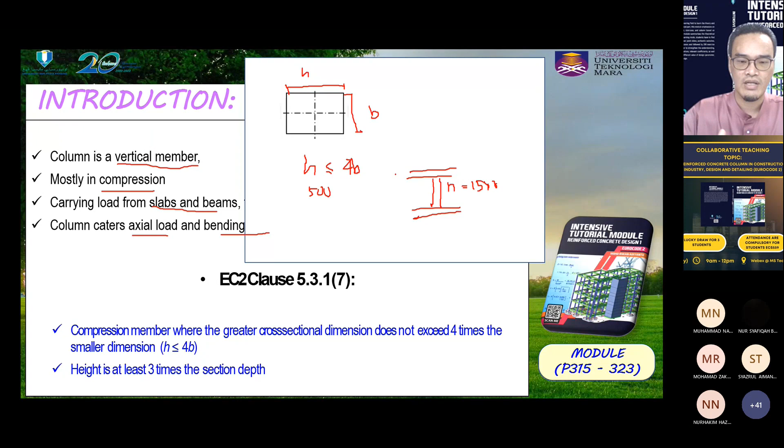So this is the classification of the columns, where we have the braced or unbraced columns. The braced column is the column or situation where the lateral loads are resisted by the shear walls or other forms of bracing, which is capable of transmitting all horizontal loadings to the foundations.

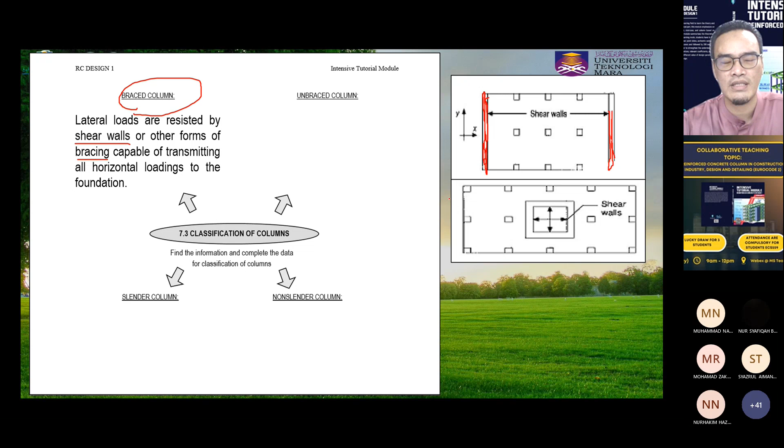As we can see in the figure on the right of your screen, this is the plan view of a structural system, and this one can be considered as the wall, and this is also the wall. For this type of key plan, the column can be considered as a braced column, where the lateral load is resisted by the shear wall.

But the unbraced column is the situation where the lateral loads are resisted by the frame actions of rigidly connected column, beam, and slab. So this is the example of the key plan.

And we have the slender column, which is like this one. Slender or tall column is a very long and thin column, and its failure will be subjected to buckling. Another one is the non-slender column, also known as the short column. This is the figure of the short column, and the failure mode is by crushing.

So this is the procedure to check the slenderness ratio of the column. This is the flow chart, step by step. First of all, we calculate the clear height of the column, and then we calculate the moment of inertia. You don't have to worry because this step we will try in tutorial number 1 later.

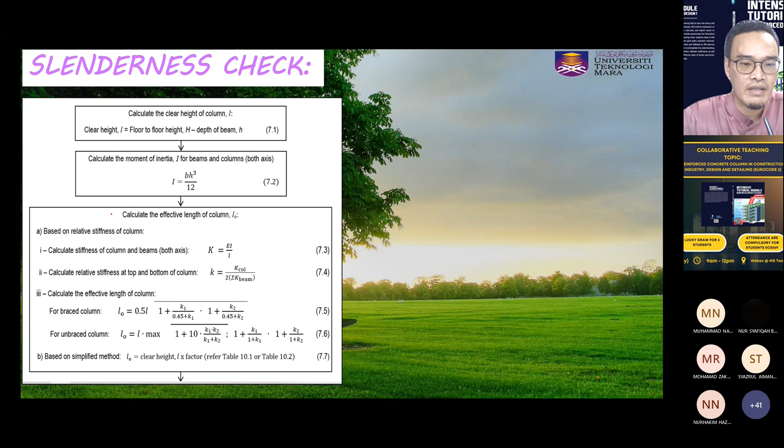And then we can calculate the effective length of a column. Then we proceed with the calculation of the slenderness ratio, this is the actual, and then we calculate the slenderness limit, and compare the slenderness limit to the slenderness ratio. If the slenderness ratio is greater than the limit, the column is considered as slender or tall column. However, if the slenderness ratio is lower than or equal to the limit, the column is considered as non-slender column. You can refer to figure 7.3 in my module, on page 317.

So these are the common failure modes of column. First of all is by buckling, as mentioned before, this is subjected to the tall column. And then this one is by compression, you can see the figure of the real situation on site. Compression is subjected to the short column, and at the middle, if the column fails at the middle, this is strongly subjected to shear failure.

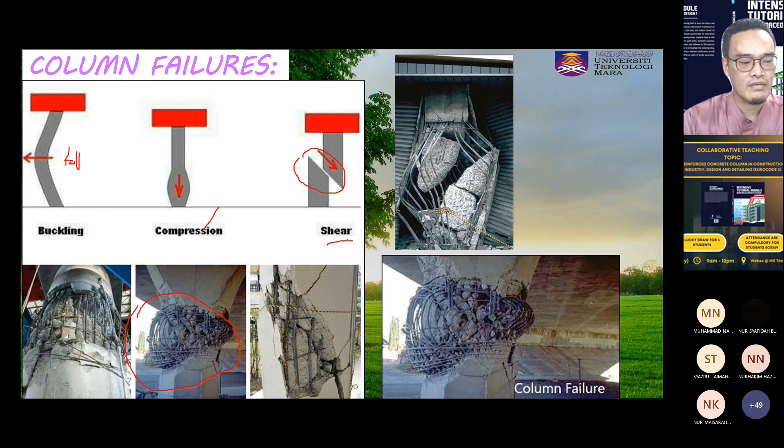So this one is about the axial load and the bending moment. This is in figure 7.4, on page 319 of the module. Theoretically, let's say we want to calculate the bending moment and the axial load, which is the vertical axial load acting on the column located at grid line B2, which I labeled as C3 here.

So we have to consider the slab tributary area. We can observe here that we have 4 slab panels, this one, number 2, number 3, and number 4, which attach on the beam, and the beam is also connected to the column.

So this is the area - quarter of the area from slab 1, quarter of the area from slab 3, quarter of the area from slab 2, and quarter of the area from slab 4, which is half. For slab number 1, length of A to B we divide by 2, so we get the region, and length of grid line 1 to grid line 2 we divide by 2, so we get the region. This is the region where all the loading from this slab and half of this beam and half of this beam will be transferred to the column labeled as C3.

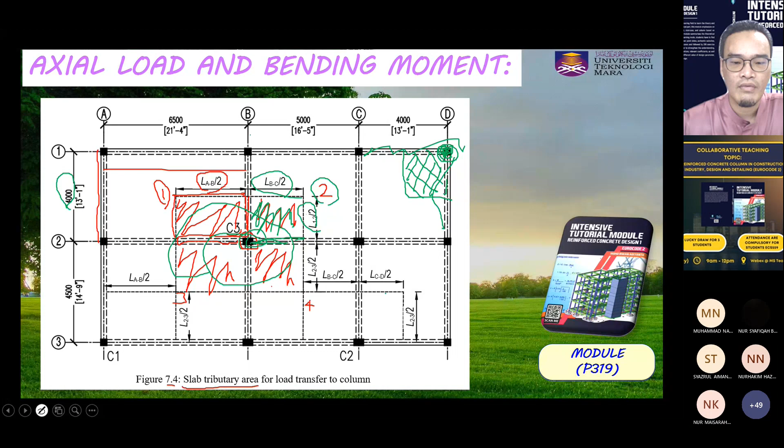So this is about the bending moment. The bending moment in the column can be determined based on the maximum load combination, which is 1.35 GK, where GK is the permanent action, plus 1.5 QK, where QK is the variable action. The minimum only considers the permanent action on beams supported by the column. Let's say we have beam number 1 and beam number 2 - beam number 1 will consider the maximum load combination, and beam number 2 will consider the minimum load combination.

This is the important concept that you have to know: that the stiffness of beams and columns strongly influences the bending moment.

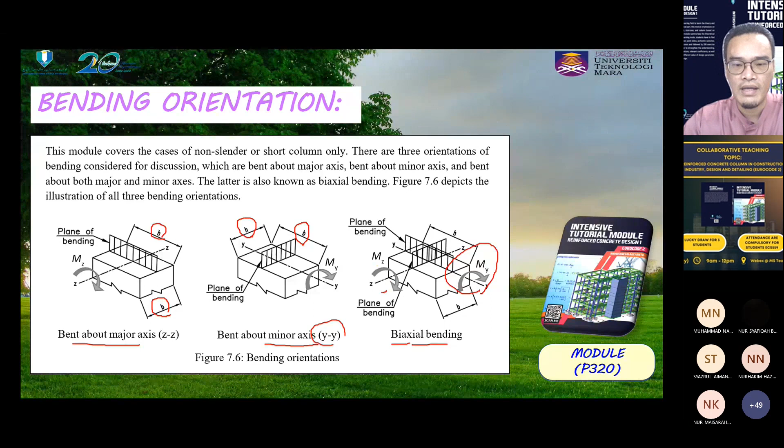So this is an example from this key plan, we can try together. The 3 cases: case number A is biaxial bending, case number B is bend about the major axis, and case number C is bend about the minor axis. Can I have somebody to help me? What is the case at A1 - case A, B, or C? Anybody can try? The column will bend about A, B, or C - which case is it?

Okay, my tab is all functional now, alhamdulillah.

Okay, the column will bend about A, B, or C. Let me give a clue.

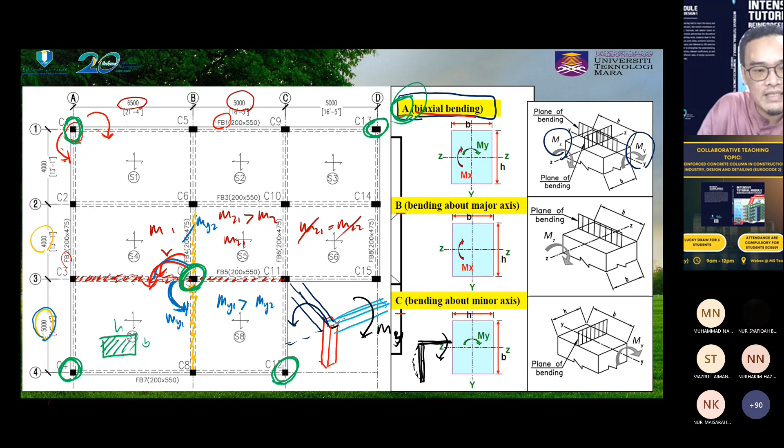So how about case B? You have to look at the dimension of the column. Let's say we have a rectangular shape column like this one, so we might have B and H. Let's say for the case of C6, we have to erase this.

This one you have FB3, so the M1, MZ1. MZ because H is larger than B, this is MZ1, and the dimension is also larger than another part, so MZ1 is larger than MZ2.

However, for beam FB4, which is located vertical, you see the vertical beam here. The dimension is equal, 4,000 and 4,000, and let's say the loading is also similar, so we can assume the moment, this is MY1 and this is MY2. MY1 equal to MY2, so the bending for this direction is cancelled out. The bending is uniaxial and will occur at the major axis, which is B. So C6 is B.

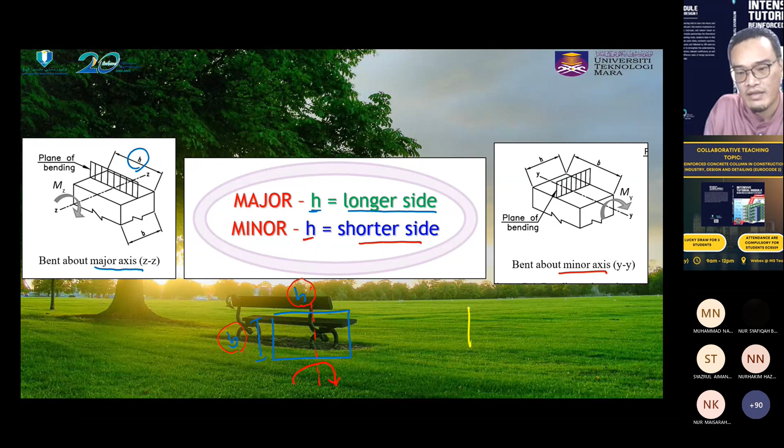Let's say I use this one, and the column, let's say this is 400 and this is your 200. So the bending, let's say the bending is here. This is MY, bending about the minor axis, so 200 becomes your H, the shorter side, and the 400 becomes your B. Any question up to now?

No question. Okay, then this is the design procedure for uniaxial bending.

You can refer to the flow chart in page 321. Uniaxial bending is the bending about major or minor axis only, that's why it's called uni, just single direction. So this is the procedure, it's okay, you don't have to worry. We will do this for tutorial 2, tutorial 7.3.

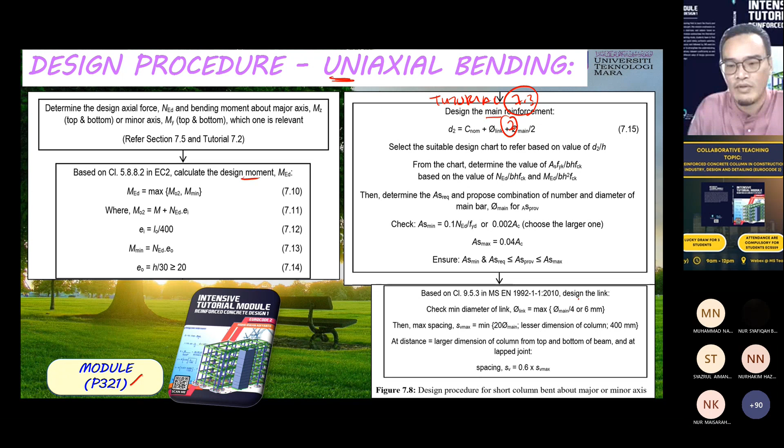So this one is the design procedure. Until we calculate the design moment, we calculate the main reinforcement, and then we design the link. And then for biaxial bending, it's in page 322. This one is quite complicated, because we have to design the main reinforcement and then check the capacity against biaxial bending. So first we have to calculate the design moment, and then check the requirement for biaxial bending based on clause 5.8.9 in Eurocode 2. We have to fulfill all these two main requirements.

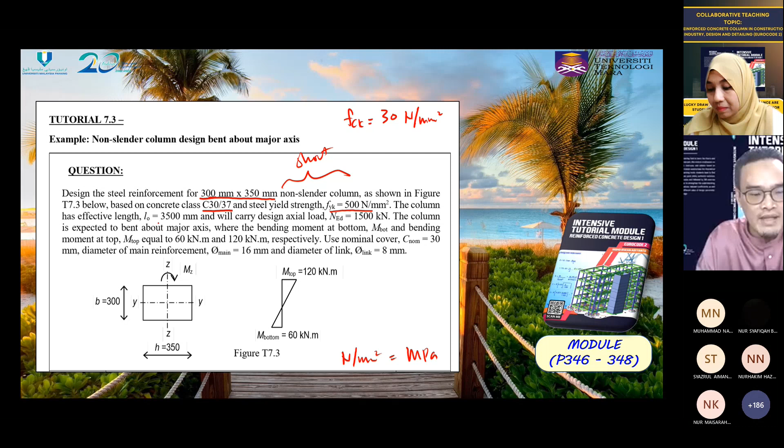So the column has effective length, L0, equal to 3,500 mm and will carry design axial load, NED equal to 1,500 kilonewton. And then the column is expected to bend about the major axis, so this is MZ. So the bending moment at bottom and bending moment at top equal to 60 kilonewton and 120 kilonewton.

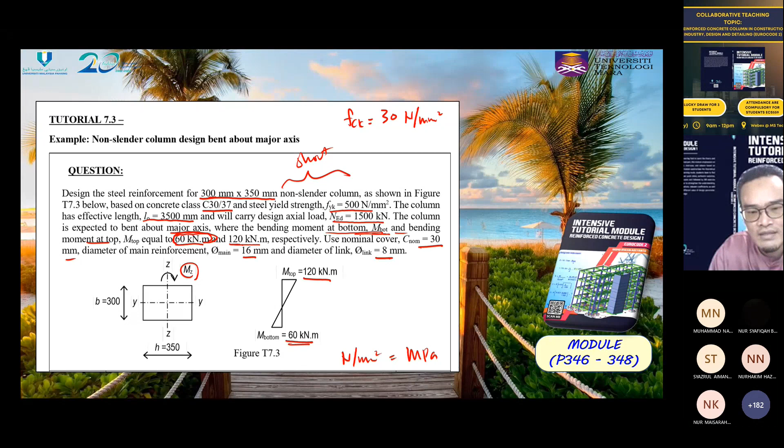So at the bottom is given as 60. So you must be able to read in sequence. So when the sentence mentions the bending moment at bottom and bending moment at top, means the first value belongs to the bottom, which is 60 kilonewton, and then 120 kilonewton belongs to the top. So you must be careful about the sequence of the words used in this sentence. So use the nominal cover, Cnom equal to 30 millimeter, diameter of main reinforcement equal to 16, and diameter of link equal to 8 millimeter. Okay, so I can proceed to the next slide.

So first of all we have to calculate the design moment based on this clause in Eurocode 2. For the non-slender column, the design moment, we have to choose between M02 or M minimum. So M02 is equal to M plus NED times ei, ei is the eccentricity. And then M maximum is between bottom and top. So we select between bottom - this one if you can see, 60 kilonewton, bottom we write down here. And then M maximum is 120, so we write down here. So we select the maximum.

So what is the M now? I hope in this session I need more participation from students to give the answer. 120? Yes good, it's 120, the unit is kilonewton meter. And then ei is equal to L0 over 400, which is equal to 3,500 divided by 400. And may I have the answer?

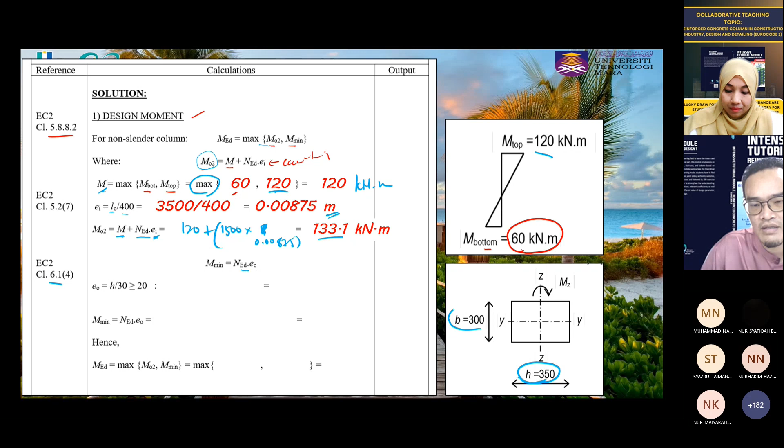So M minimum is equal to NED times E naught. E naught is equal to, you refer to this clause in Eurocode, H over 30. What is the value of H for this case? Because this is the major axis, H is 350, this is the longer side, and B is the shorter side, so it's 300. 350 divided by 30, you will get 11.7.

This is lesser than 20mm, so we need at least 20mm. So we use E naught equal to 0.02 meter, converting the unit to meter. And then M minimum is equal to 1,500 times 0.02. Can you give me the answer?

M minimum is 30, good. M minimum is 30 kilonewton meter. So the MED, which is the design moment, we select between these two - between M02 or M minimum.

So we write down here, this is M02, 133.1, and then M minimum is 30. So this is simple - the M maximum we can use is equal to 133.1 kilonewton meter. So we will design based on this value of moment. Any question on this procedure? I hope it's clear. No sir, no question.

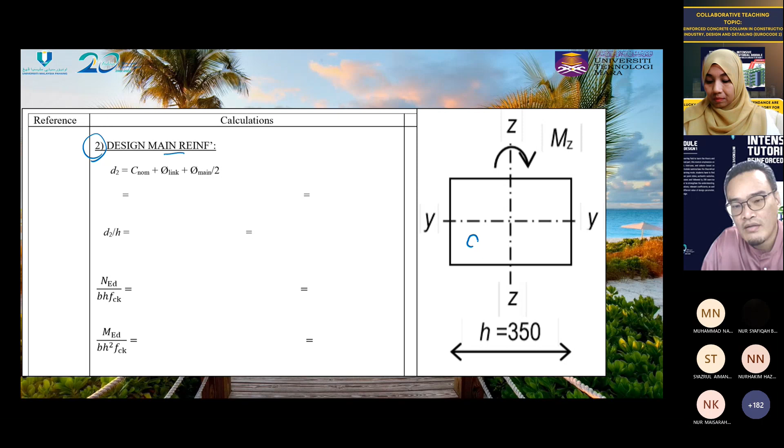Next procedure is procedure number 2, which is the design of main reinforcement. This is the main reinforcement, this is our H, so the D. Let's say this is our column cross section, and this is our main reinforcement - let's say 1, 2, 3, and 4.

And then we shall have, let's say green color, this one is your link - the shear reinforcement or the confinement reinforcement. That's the terms you must master. This one is your link. So I hope you know how to calculate the D.

So this is your D2. D2 is equal to C nominal - this is C nominal from the edge of the concrete to the outer edge of the link, and then the diameter of link, and then the diameter of main bar divided by 2. Can you give me the value of D2? C nominal 30 plus 8 plus 16 over 2. 46, okay good, it's 46 millimeters.

So D2 over H. 46 over 350 equal to - D2 over H is very important. 0.131, okay good, so you can use 0.13.

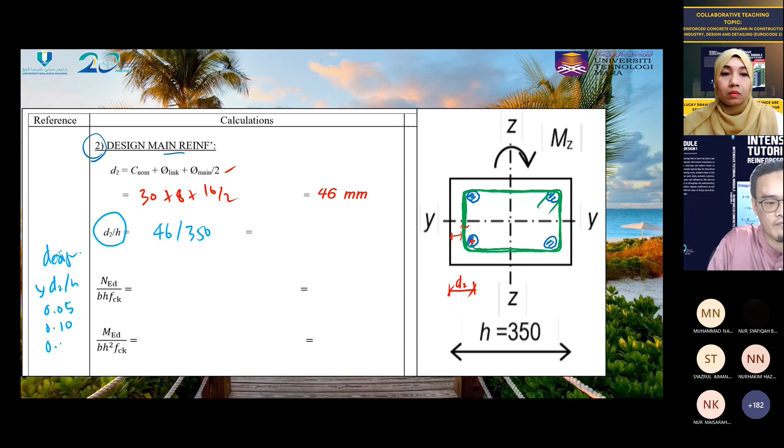D2 over H is very important to determine which design chart you have to refer to, because you have design charts for D2 over H equal to 0.05, 0.10, 0.15, and 0.20. Each design chart will give you a different result. For this case it's 0.13, so we may use the design chart of 0.15.

Before using the design chart, we have to determine the value of NED over BH FCK, and we have to determine the design moment over BH square FCK. That's why B and H are very important. Between the major and minor axis, you have to determine which one is B and which one is H - either the longer side is H or the longer side is B. So may I know this one?

NED is equal to 1,500 times 10 to the power of 3. Remember, when you are dealing with axial force for this type of calculation, you have to multiply by 10 to the power of 3 for unit conversion. Our B is equal to what value? 300, okay good, 300 times 350, and then FCK, as mentioned earlier, is 30.

So what is the value here? 0.476. Okay, so we make it 0.48 - make 2 decimal places only for easier use of the design chart later.

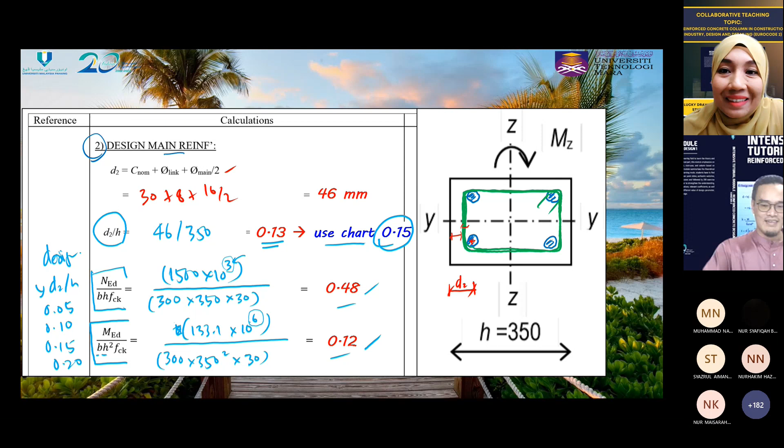Okay, so we refer to this chart.

So we have to know the value of N over bhFCK, which is 0.48 based on our calculation before, and then the M over bh square FCK, this one is equal to 0.12.

So on this chart, this is for 0.48, between 0.4 to 0.5, you have to scale it properly, and then draw a horizontal line in blue color. For the bending moment, you draw the red color vertically, and you have to scale it down properly.

So you can see 0.10, this one is 0.11, so this is 0.12, here is 0.13, 14, and 15. So we use 0.12 based on our calculation.

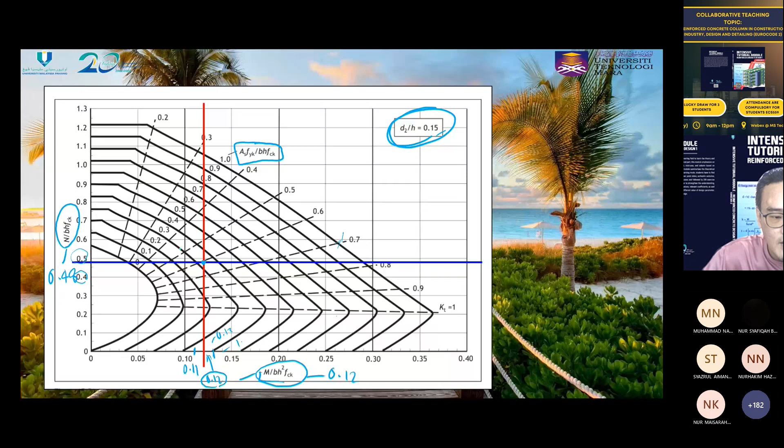Let's say I change the color. The yellow color here is for 0.3, and then I use a green color. The green color here is 0.4. So the ratio is located between 0.3 to 0.4.

So you have to estimate the exact value. Based on my observation, anybody want to suggest the value?

It's here, located here. So let's say this is 0.35. So let's say I use this one equal to 0.33.

So the ratio of ASFYK divided by BHFCK is equal to 0.33.

So we rearrange this equation to become like this. We bring down the value of 0.33, and then we have BHFCK and FYK. So we want to know the AS required. We solve this equation.

So may I know the value of AS required? 2079. Okay, good. Thank you. 2079 millimeter square. So we refer to the chart.

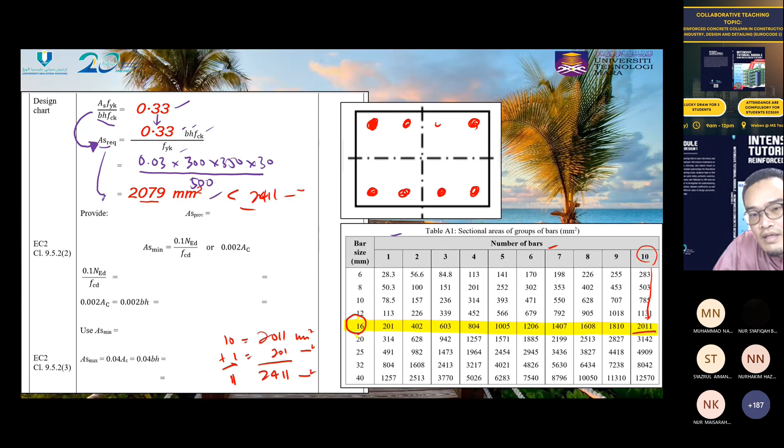Okay, so this is also 11. Boleh tak you susun macam ni? Dari segi calculation dah okay, tapi dari segi practicality tak okay. As engineer, you have to think how the workers will install the steel bar later. So let's say we have 11: 1, 2, 3, 4, 5, 6, 7, 8, 9, 10, and 11. So it's quite rare, agak-agak janggal kalau kita ada column yang sebegini.

So we better have another one, which is 12. So if 12, H16, may I know the AS provided? Let's say 2011 plus 402, so the answer is 2413. Betul, good. So provided is 2413 mm square. This is greater than the AS required, so it's okay, and we have a better arrangement.

So we have to check, based on this clause 9.5.2 in bracket 2 of Eurocode. Before we proceed, I'm sorry because of an error in the module - this one shall be FYD, not FCD. FCD is for concrete, but this one is for steel, FYD. Sorry for the typing error. I hope I can revise the module soon, maybe in the second edition I can repair it.

So this one, 0.1 times NED is 1,500, times 10 to the power of 3, divided by FYD, which is 0.87 times FYK, 500. So what is the value? Anybody can help me give the answer?

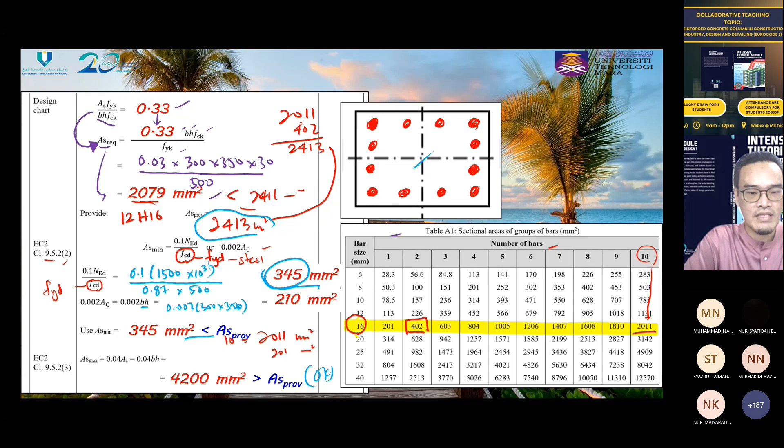Okay, next. So this is the arrangement, then this is the calculation, the comparison between provided and maximum and minimum. So this is the design of the link.

Based on this clause in Eurocode 2, the minimum diameter of the link shall be this one. This means you have to select the maximum between the diameter of main bar divided by 4, and 6 mm. Diameter of main is 16 divided by 4, which is 4. So we select maximum between 4 and 6, which is 6 mm. So we propose 8 mm, which is greater than the minimum of 6 mm, so it's okay. We can proceed to the spacing.

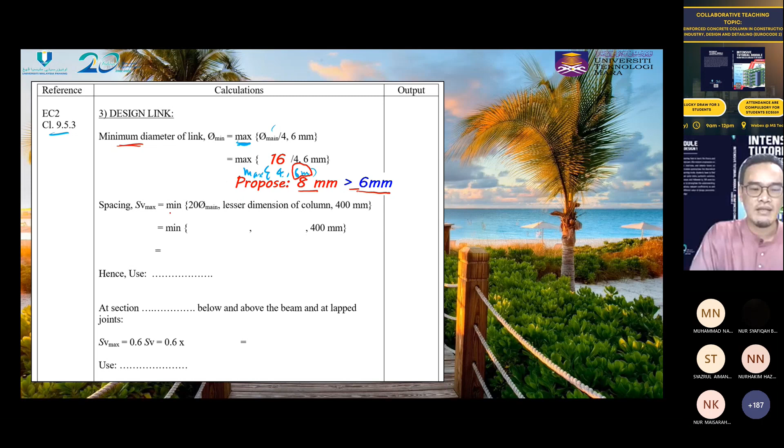This one we select the minimum. Make sure you know how to find this page - refer to this clause. Sorry, saya tak ingat page nama yang mana. I believe this question will not be given in the exam because it's already inside the code, so you must know it.

So 20 times diameter, which is 16, and then the lesser dimension of column - we have B equal to 300 and H equal to 350. So we select the lesser, which is 300, and we select the minimum between the results: 20 times 16 is 320, 300, and 400. So we select this one, and we can use H8 at 300 millimeter center to center.

However, this is at the middle of the column. At the section, we select the larger dimension - 350 is the larger section, because we have a rectangular column: 300 and 350. So at the section, 350 mm below and above the beam and at the joint, the S maximum is 0.6 SV, so 0.6 times 300 equals 180.

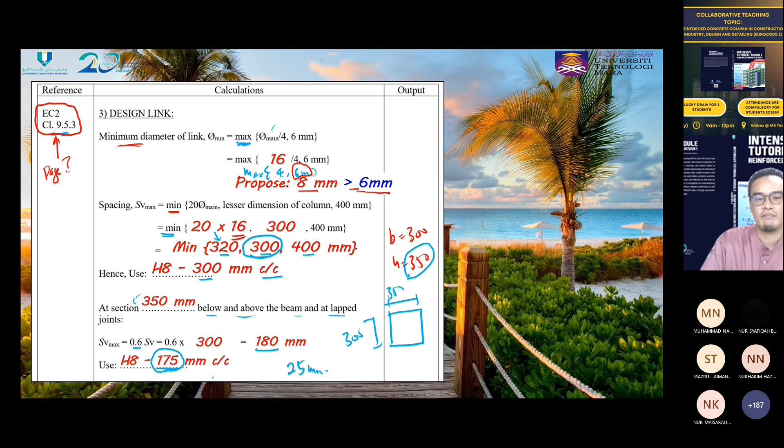Okay, 180, so we can propose H8 at 175. We try to use increments of every 25 mm, so we lower down to 175 - this is the practical practice on site.

Okay, so now we come to the detailing. Make sure you know how to draw this - this is the elevation view, and this is the cross section, which I got from my sketching. So this one, we have twelve numbers of steel bar in the cross section.

This one is 350 mm lower than the soffit of the upper beam, and then this is the lapping zone - you can check this in the code. Usually we don't provide lapping too close to the beam at the bottom, because this is seismic design - we call it the critical region. So the lapping must be provided outside the critical region.

So this, let's say the green color - this is what we call the starter bar. That's why we provide lapping here, from the bottom column starter bar, and then the reinforcement we calculated just now - let me use the red color.

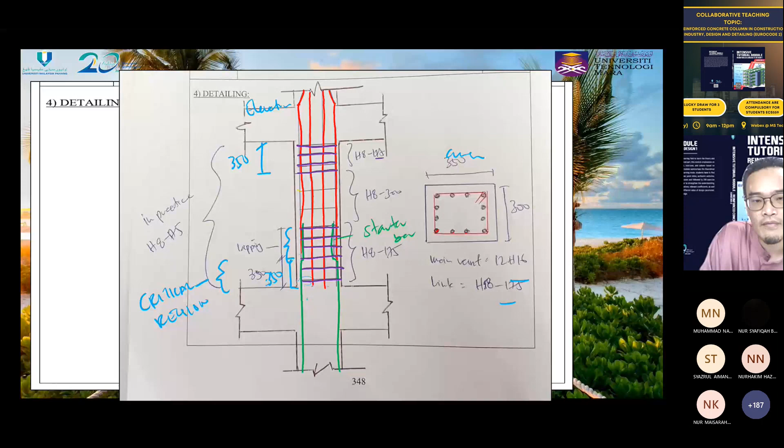Okay, this is also here at the lapping. And outside the lapping, at the middle, we can use a larger spacing, which is 300, based on our calculation.

But usually in practice, we use the spacing of 175 for all, from bottom to the top, we use the spacing of 175 all.

Okay, this is to save the cost, but this is okay. We use a larger spacing at the middle to save the cost because we can reduce the steel reinforcement. But in practice, for faster work or better supervision, we can provide equal spacing.

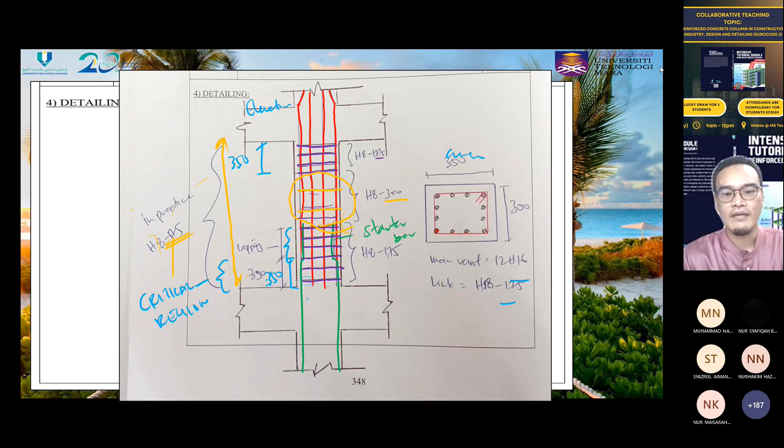Okay, that's all for this tutorial. Congratulations. So those who have the module can try exercise A1 and A2 on page 331 and 332.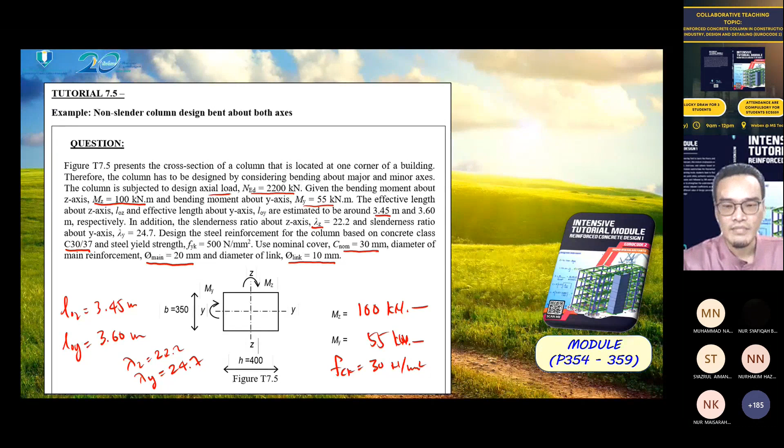Okay, so we start with the first step which is to calculate the design moment. The step by step is based on the flow chart which I shared with you in the short lecture at the early of the session. Okay, so the imperfection moment we can calculate based on these equations.

Okay, so the imperfection moment is equal to, okay, we do it together. So NED is equal to 2200, and then L0 of Z is equal to 3.45 divided by 400. So what is the imperfection moment about Z axis? 18.98, okay, we can use it as 19. And then how about the Y axis? 3.6, okay, 19.8, okay 20, it's just a matter of decimal places.

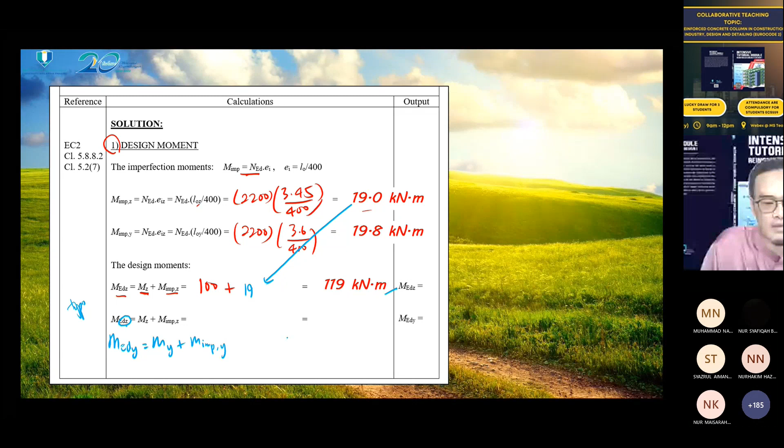Okay, so the design moment for Z-axis is the given MZ plus the imperfection moment of Z-axis, so it's equal to 100 plus 19, so it's equal to 119 kilonewton meter. Okay, but for this one, this is actually MEDY. Tadi dah Z, so this is a typing error, typo, very sorry for this mistake. So this one MZ, this actually is MY, and then this is MY. Okay, so the MY is equal to 55 plus the imperfection which is 19.8.

Okay, can I have the answer, please?

74.8 kilonewton meter. So thank you. So the second step is to check the requirement of biaxial bending.

The source of this figure is figure 5.8 from Eurocode 2. Let's say the column has an offset. This is the center of the column, and this is the center of the axial force. So this is the eccentricity about y-axis, and this is the eccentricity about z-axis. So we have to find the eccentricity.

Moment MEDY we calculated before is 74.8 times 10 to the power of 6 divided by NED, which is 2,200 times 10 to the power of 3. So we can observe here that MDY, about the y-axis, this is MEDY, will create the eccentricity about z-axis. That's why the equation uses MEDY. So may I have the answer?

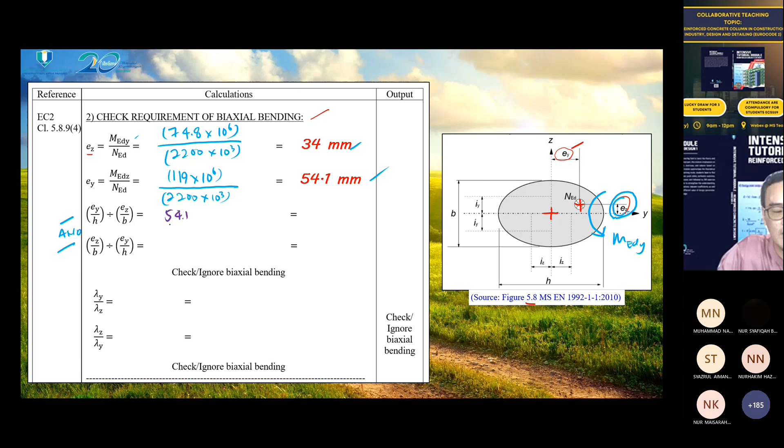So can we do it together? EY is equal to 54.1. H, in this case, is the longest, which is 400. So we divide exactly 34 divided by 350. What is the value here? 1.39, which is greater than 0.2.

So how about another one? Which is 34 divided by 350, divided by 54.1 divided by 400. 0.72, which is greater than 0.2. According to the code, the limit must be lesser or greater than 0.2.

If these two conditions already exceed the limit of 0.2, we have to check. Yes, we have to check the biaxial bending. The conclusion is we have to check the biaxial bending.

Another checking is the slenderness limit, the slenderness of y-axis, which is 24.7 divided by 22.2. How about this one? 1.11. This one is lesser than 2.0, as limited by the code. The code limits the value to 2.0 or lower.

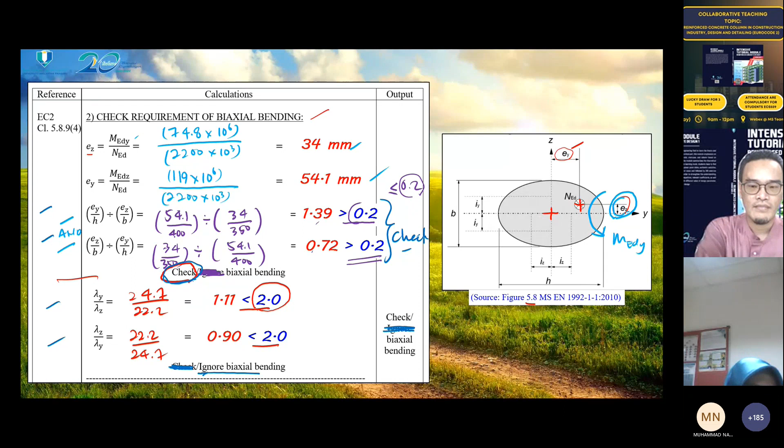So this one, we have to design the main reinforcement. Step number 3, we have to calculate the effective depth, which is H prime and B prime. This is for the major axis, H prime, and this for the minor axis, B prime. So can I know the value of H prime and B prime?

Okay, you just use this equation, and then you just have to replace B with H for H prime. May I know the value of H prime?

Anybody can help me? H prime, 350. 350. And then B prime? 300. Good, 300 mm.

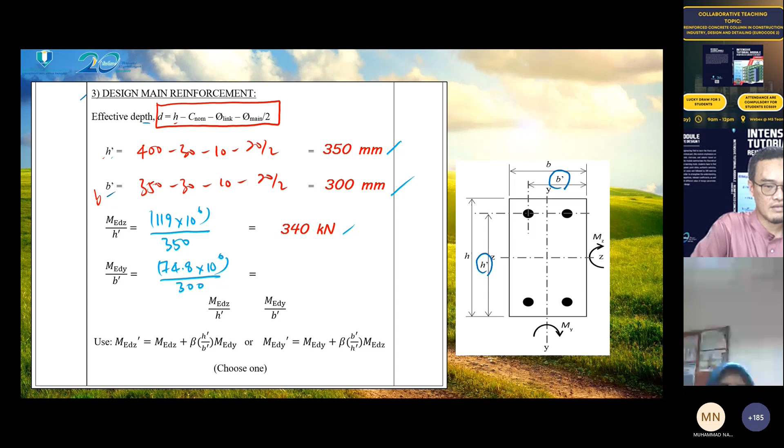340 kilonewton, okay, 340 kilonewton, and then another one is 249 kilonewton, okay, 249 kilonewton. So we have to, okay, this one, please give your attention.

So this one you have to compare, okay, between these two ratios. MEDZ over H prime, you compare to the value of MEDY over B prime. So we can observe clearly here that 340 is greater, okay, this one is 340 and this is 249. So MEDZ is

greater than MEDY over B prime. So we select this equation, okay, to determine the value of design moment, final design moment. If, okay, let's say the value of this one is 400 kilonewton. Okay. So this one is greater than 340. So we use this equation.

Okay, so this one you have to be careful. Then maybe you can check this one in Eurocode, or those who have the module you can check in the flowchart.

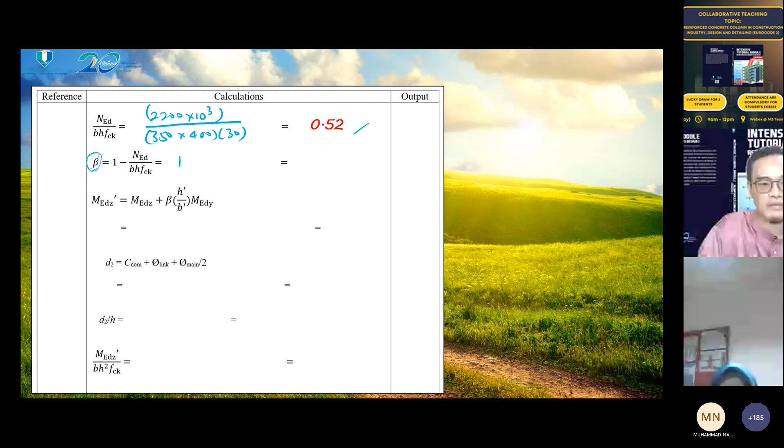So because the beta will be used in the equation we selected before, okay, so this one is 1 minus 0.52, okay, because this one is here actually. Okay, so what is the value of beta? 0.48, okay, because 1 minus 0.52.

So the beta shall be greater than 0.3, and the beta shall be lesser than or equal to 1.0. So 0.48 is here, okay, it's in between, so it's okay. So we can use this equation.

We can insert the value of MEDZ plus the beta 0.48, then the H prime over B prime, 350 divided by 300, times EDY, and EDY is 74.8 times 10 to the power 6. Okay, may I know the final answer?

Okay, anybody can help me? Anybody from UMP or UiTM?

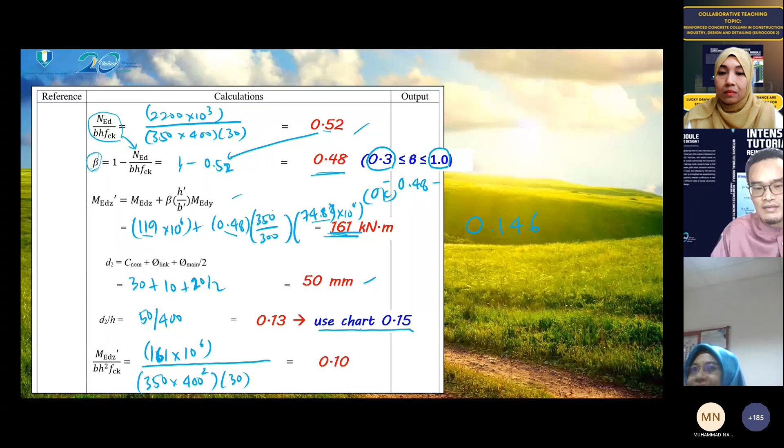Okay, 350 times 400. Okay, thank you, so answer? 0.096, okay, so we make it 0.1. 0.096, okay, so if you want to use this chart, I advise up to 2 decimal places.

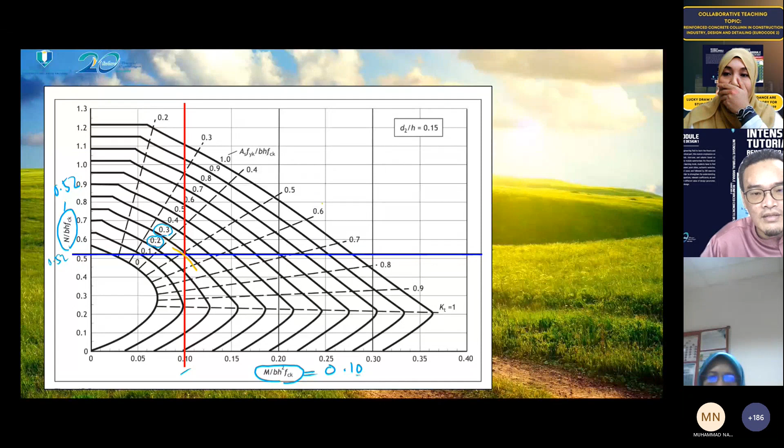Okay, so can anybody estimate, is it between 0.2 to 0.3? Anybody can help me? Okay, good, thank you, 0.28 or 0.29. So we take the bigger one. Okay, we take this one equal to 0.29, because it will give a bigger, safer result. So 0.29, so the ratio is 0.29.

And then we settle it as required.

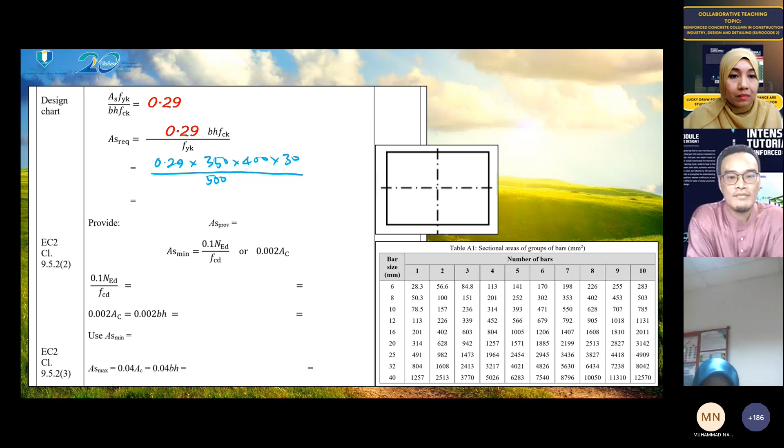Times B. Make sure not to make the same mistake as before. Multiply by 400. Okay, but divide by 500. 2436. Okay, good, thank you.

2436 millimeter square. So by referring to the table of steel reinforcement, which one do we propose? Make sure if the question gives you 20, you refer to the 20. Sometimes the question gives 20, but you refer to the 16 or bigger. So how much do we propose? H20. 8H20. Okay, thank you, H20 and the number is 8.

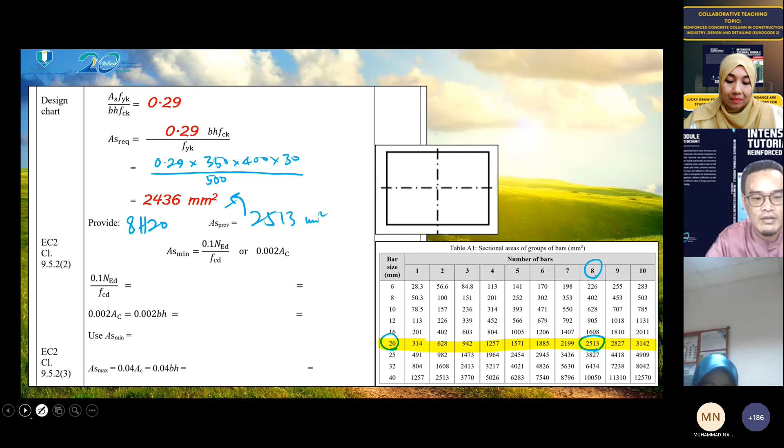Because it will give us 2513. So we propose 8H20. The provided is 2513 millimeter square. So this one is greater than the required. So how do we arrange the steel reinforcement?

Let's say, of course, at the corner, 1, 2, 3, 4. Can this work? 1, 2, another one, 7 and the 8th. Okay, so it looks symmetrical. So we check the As minimum.

This one is also a typing error, this shall be FYD, and this is also FYD. So FYD is equal to 0.87 times 500, giving 506 mm square.

So how about this one? 208, 3500? No, wrong. 280, okay thank you. So which one do we choose, 506 or 280? 506, okay, thank you.

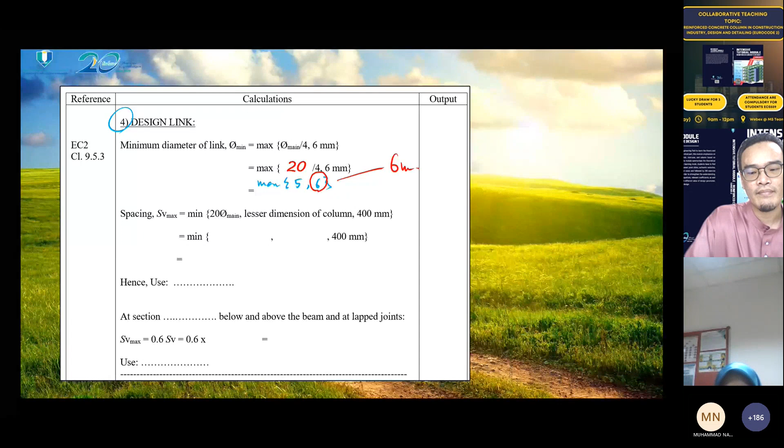So in this case, do we propose 6 or 10 diameter? Forgot, it's 10 right? Okay, so this one shall be 10. So we propose 10 mm, which is greater than or equal to 6 mm.

So it's okay. For the spacing, 20 times the main diameter, and the lesser dimension of column. What is the lesser dimension of column? 350, okay yes good, 350.

So we settle this calculation. We have to select the minimum value between these three values. So obviously it's 350. So we can use, sorry, this one is H10, 350 millimeters center to center. This is at the middle of the column.

So at section, this is the largest side of the column, which is 400 mm. So 0.6 SV is equal to 210. Okay, 210. So what value do we want to propose?

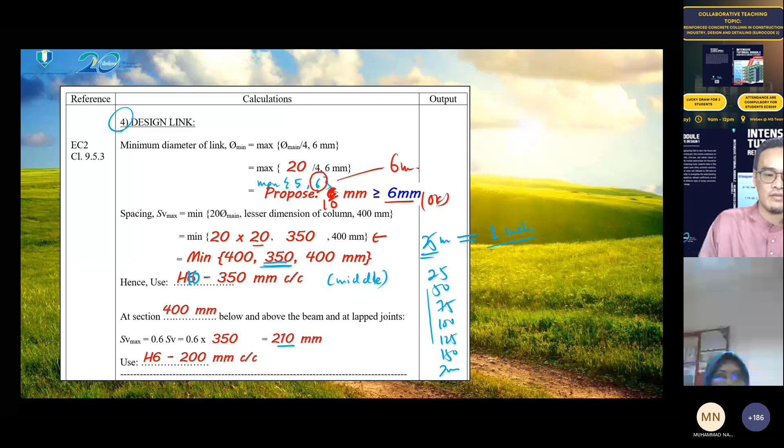So this one is H10 actually, sorry for the typo. And then this is the checking of biaxial bending.

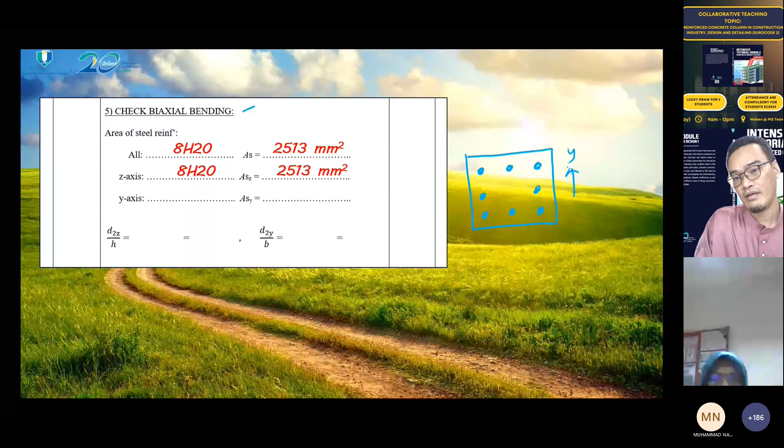This is the additional work if you are working with biaxial bending. So the area of steel reinforcement, this is the overall provided. So the z-axis also 8H20 because we provide this one. If you still remember my sketching, we provide symmetrical between the y and z-axis, so symmetrical.

So the ASZ and ASY are similar. So D2Z over H is equal to D2, which is 50 over 400. And then D2Y is D2, also 50, similarly divided by 350. So can I have the answer?

So we can use the design chart of 0.15 again. Okay, we use again this design chart.

The N over BHFCK we calculated before is equal to 0.52, and this one ASZ, so this is 2513 times FYK is 500. This is the reverse step actually.

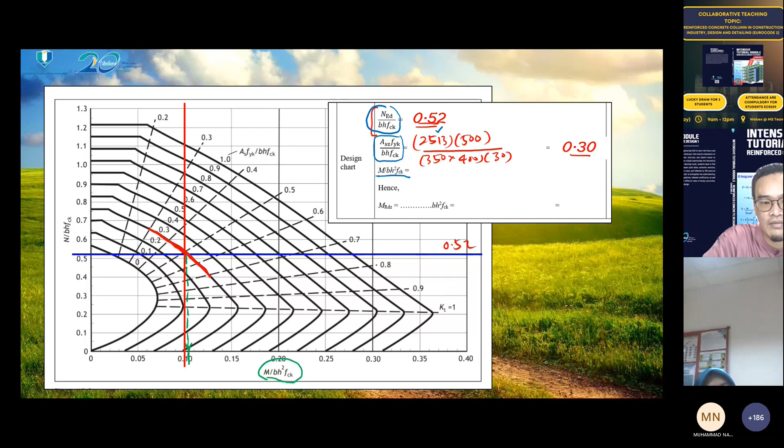0.102, okay, or I use this one, sorry. It should go here again. So 0.103, okay it's okay. We bring the value there, so we can calculate 0.103 over 350 times 400 square times 30.

So what is the value of moment MRDZ? Any value? 6.13.

Oh sorry, this is not divide, 61.3, not divide, sorry, I can't see it. Times, next time. Times 350 times 400 square times 30. The equation, I can't see because something is covering it.

173, 173 kilonewton meter. Okay sorry, my apologies. So 173 kilonewton meter.

Thank you. So the next step is calculate this MRDZ, MR means moment resistance or the capacity for the Z-axis. And then this is the ASY - the value is similar to 2513 times 500 because our arrangement is symmetrical, so the answer will be similar, so you don't have to calculate twice actually.

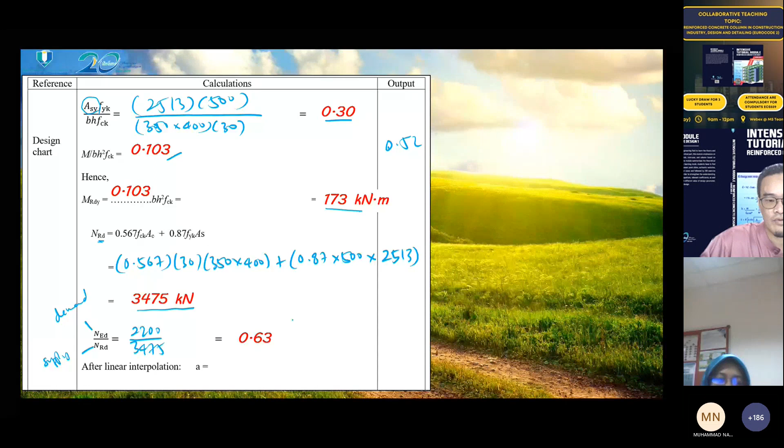So we must use the interpolation. We have to refer to this table, which is table 7, in page 75. In the module, the table is table 7.3. So the value of the ratio of NED over NRD, sorry, is 0.63.

Okay, it's in between, so you do the interpolation. Later you can do it, I'll give you the answer - it's equal to 1.44.

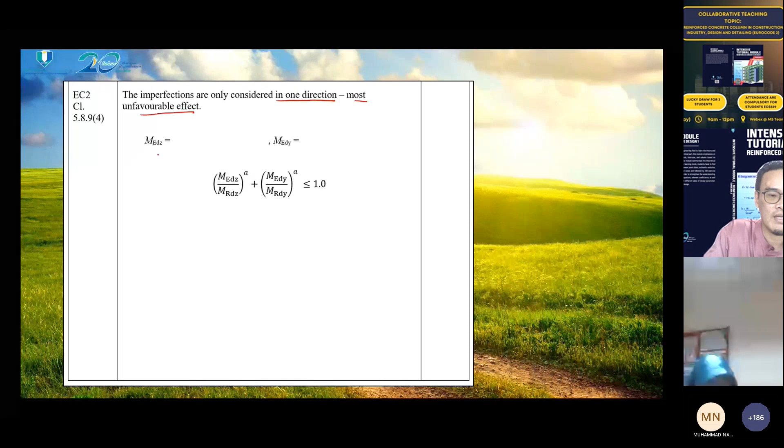Okay, so the imperfection, this is the final step. The imperfections are only considered in one direction, which is the most unfavorable effect. So the MEDZ, we can choose the maximum one from before, which is 119. And then MEDY, we can select the maximum, okay, which is the original value, 55.

Okay, so we can try to settle this equation: 119 divided by MRDZ, 173 which we calculated before, and the power is equal to 1.44, plus 55 divided by 173. Okay, 1.44. So make sure this one is lesser than or equal to 1.0.

So can I know the answer? 0.78, okay good. 0.78, so this is lesser than 1.0.

So the design is okay, it passed. So what will happen if this value is greater than 1.0? Then the design is not okay, so you have to maybe propose, maybe redesign by proposing other size, okay, other diameter of main bar, and so you can get other arrangement of the main bar.

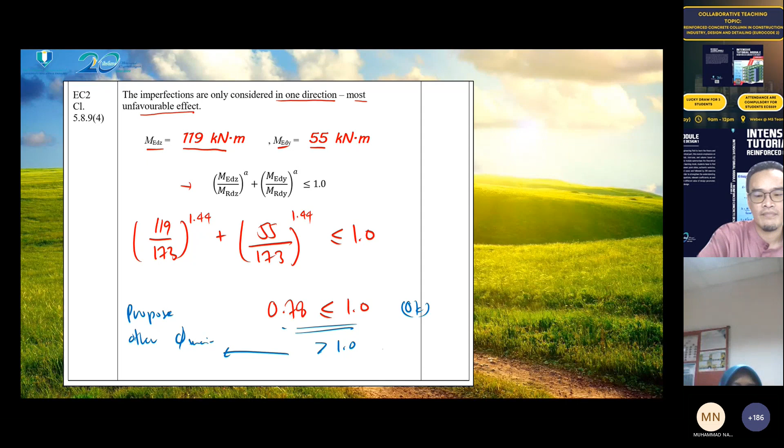Okay, so you have to recheck your calculation. So this is the detailing. On the detailing part, sorry I didn't have time to finish this one yet, but the detailing is just the same as before. So you have to consider the lapping from the bottom column.

Okay, the starter bar from the bottom column, and then this is your reinforcement. It becomes a starter bar going upward. And then the section, just make it simple.

Okay, make sure you complete it also with yours. Sorry. So complete. Sorry.

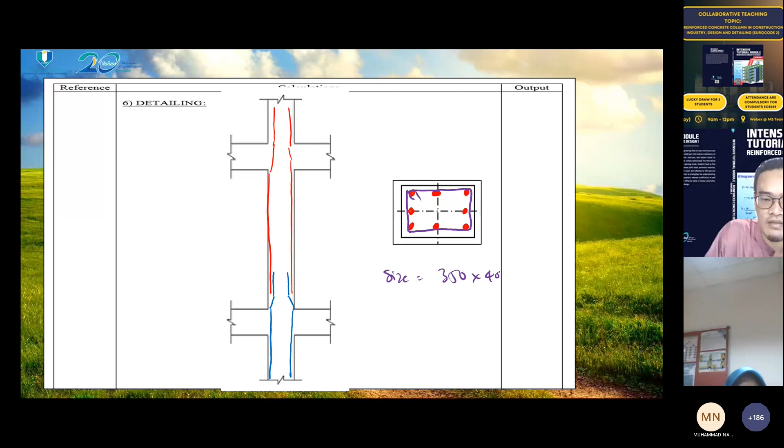Okay, this one, this is the link. Okay, so the size, 350 times 400, and then the main bar is equal to 8H20, and then the link, you can take

a H10 200. So that 200 there, from 1 until the lapping, settle. So this one is H10 200. Below here is the same. This one same H10 200. And at the top, at the middle, you can take larger spacing, which is H10 350.

Okay? Any question? No, sir. Okay, thank you.

Tahan Jumaat ya. Nasi kambing habis ni kang.

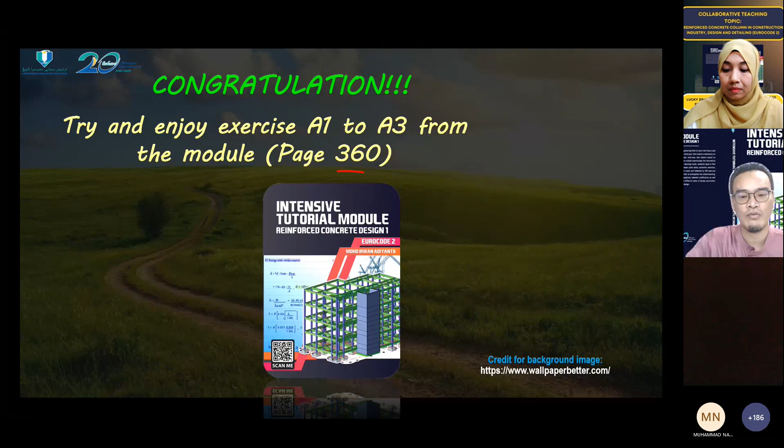Okay, so thank you very much. If you have the module, you can try page 360. Similar cases but different value, so you can be more familiar with the step-by-step. Okay, thank you very much for watching. All the best. Thank you.

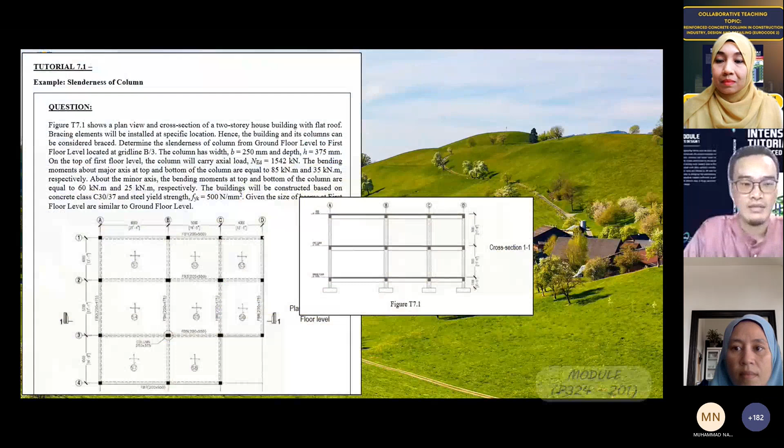Okay nampak, jom kita mulakan tutorial 1, Bismillahirrahmanirrahim, which is to check either the column is slender or short column. Bismillahirrahmanirrahim, this is the question which is actually from tutorial 7.1 in the module. You can check in student yang ada modul, boleh check muka surat 324.

Okay so this is also typo, tak betulkan lagi. Okay so you have to read the axial load and then the moment at major axis, moment at minor axis. Okay this is quite tricky, but it's okay. Saya bagi jawapan dan yang you use the printed.

Sebab Dr. Rozaina dah bagi yang PDF, so you can print lagi lah kalau you nak buat lagi sekali. So this one, the plan view, so kita nak check this one. Okay sorry, this is a screenshot jadi saya tak nampak, tapi kalau you beli modul, insyaAllah nampak dengan jelas. Okay so this is the column yang kita nak check, so this is the cross section. So given in this question, this is FB, okay floor beam, and this is the GB.

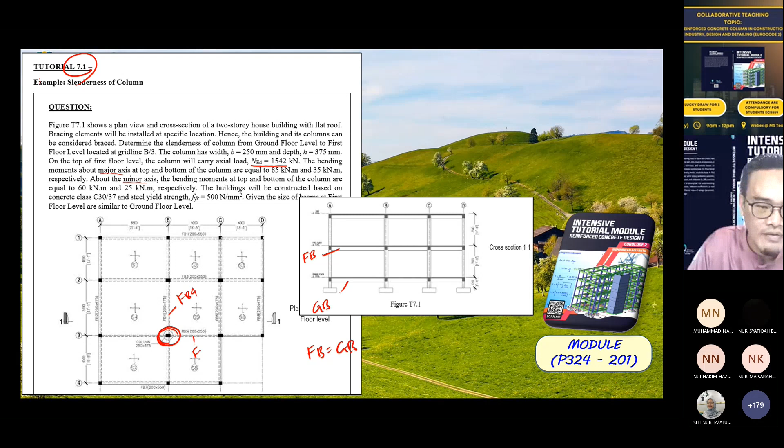Okay in this case, the size of FB equal to GB, so the stiffness are similar. Okay so this one is attached by FB4 and this FB5. Okay, so kat sini kita anatomy dia lebih jelas.

Okay this is 250, this one is 375, and then the MZ and MY ada nanti at bottom and top, based on the paragraph yang kita baca tadi. So this one is the total height, okay from top of the beam to the top of the beam here is 3,500 mm. Okay so this is FB, this one, okay the red color is FB5, this is GB5, okay same color because the similar size. So this one green color is FB4, okay the size is smaller.

FB4, the size is 200 times 450, and then the FB5 is 200 times 550. Okay so we have to check the slenderness on both Z and Y direction.

Okay so see, this is the column, this is the position of the beam. Okay so this one, sama lagi. Okay so ni dia, kita nak check yang column, this column actually. Okay so Z-axis MO2 is equal to 85. So you can write down the answer. Okay this is from the text, from the paragraph in the question. So, and MO1, okay MO2 is at the top and MO1 is at the bottom.

So we mark as negative because different direction. Okay, for y-axis, the answer is MO2 is 60 and MO1 is negative 25 kilonewton meter.

And another solution is okay, we have to calculate the clear height. Okay the z-axis, the clear height is floor-to-floor height, which is 3500 minus the beam depth. In z-axis here, z-axis is attached to the FB5. As I mentioned before, FB5 is 200 times 550, so we have to minus by 550. So the total clear length is equal to...

2950 mm. And then for the y-axis, the clear height is equal to, this is 475. Actually the FB4 is 200 times 475. Okay, so the clear height is 3025 mm.

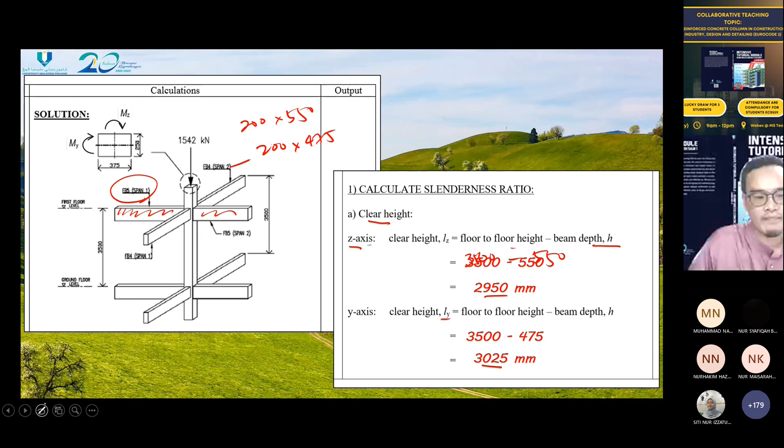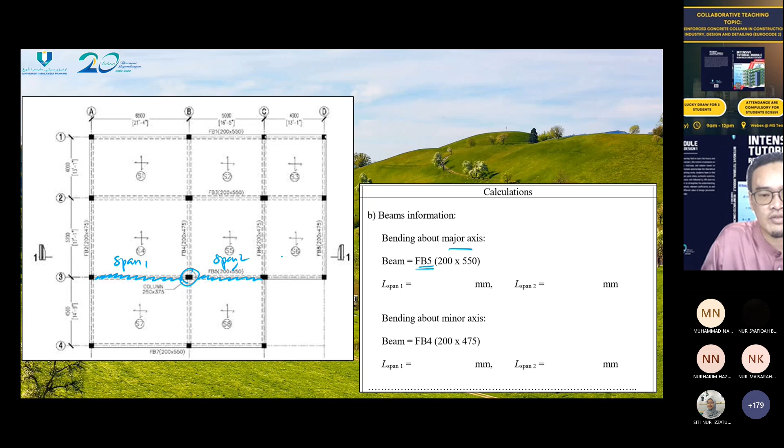Okay, so the next step is the beam. The beam bending about major axis is FB5. So we have here, the blue color is FB5, and here, okay because this is the color we have considered. So this is span number 1, span number 1, and this is span number 2. So span number 1, the length is equal to here, this is 6,500. It is very, very clear in the module.

And then this is 5,000 mm for span number 2. So bending about the minor axis, we have FB4, which is green color. I mark here, and this span number 1 is here. This is span number 1, and this is span number 2. Span number 1 equal to 4,500, and span number 2 is equal to 5,500 mm.

So we have to calculate the moment of inertia for the column. For the bend about the major axis, B is equal to 250, and H is the longer side, which is 375 mm.

So the moment of inertia, you can use this equation. You can insert the B and H. So it's equal to 1.1 times 10 to the power of 9 millimeter to the power of 4.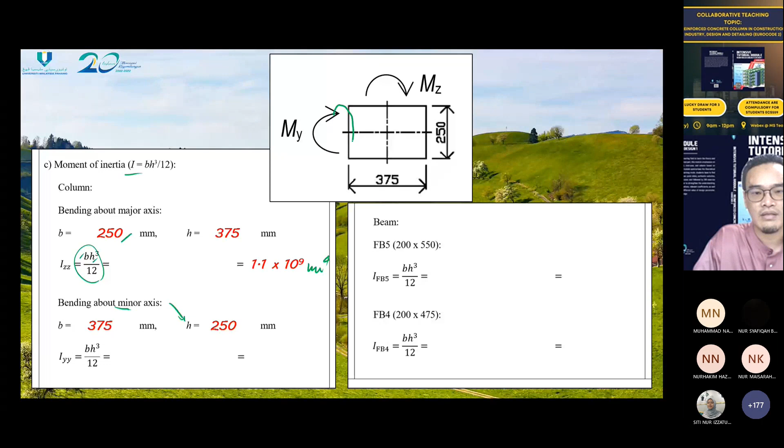Then bend about the minor axis. So B is 375 and H equal to 250. For the minor axis, H is always the shorter side. So we can calculate the inertia about the y-axis. The answer is equal to 4.9 times 10 to the power of 8.

And then for the beam, you can use this one. This is clear, this B and this H. This is the answer. And for FB4, this is the answer.

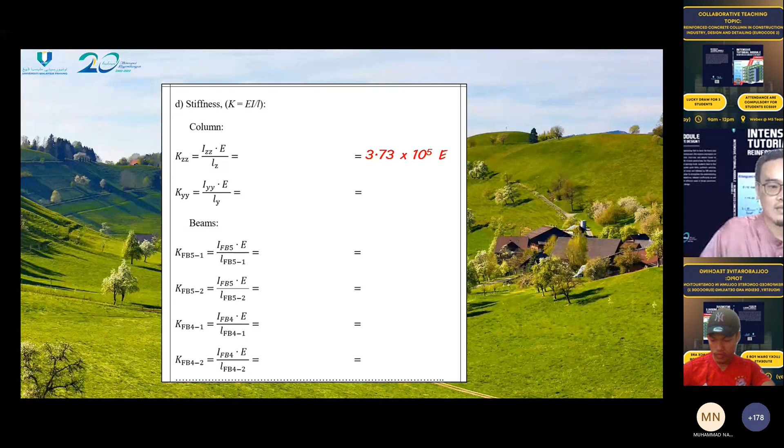Next, the stiffness. The stiffness, by using this equation, you just insert the values. IZZ equal to 1.1 times 10 to the power of 9. For E, you just leave the value of E.

And then IZ, this is the L. LZ earlier was 2950, this is the value. Same similar procedure, insert the values you got for both IZZ and IZ and L, LZ. So this is the answer.

The stiffness, the stiffness beam. This is beam FB. For example, as I said earlier, this is the top, beam at the top, and then this is the beam at the bottom. And then this is our column.

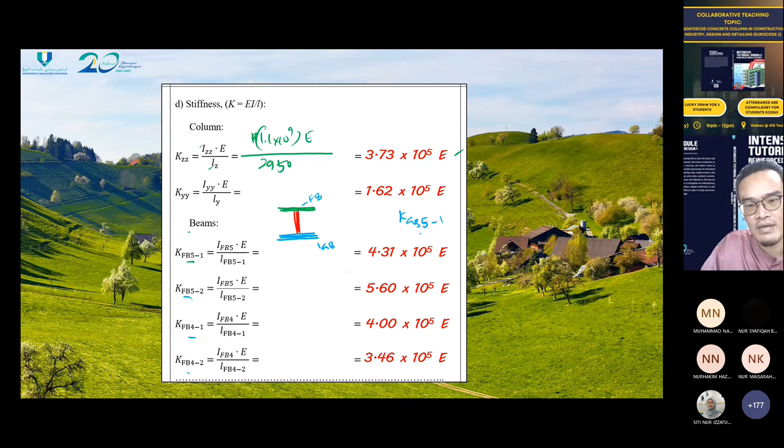Let's say the span, let's say FB5. This is numbering, and then span number 1, span number 2. You have to calculate separately.

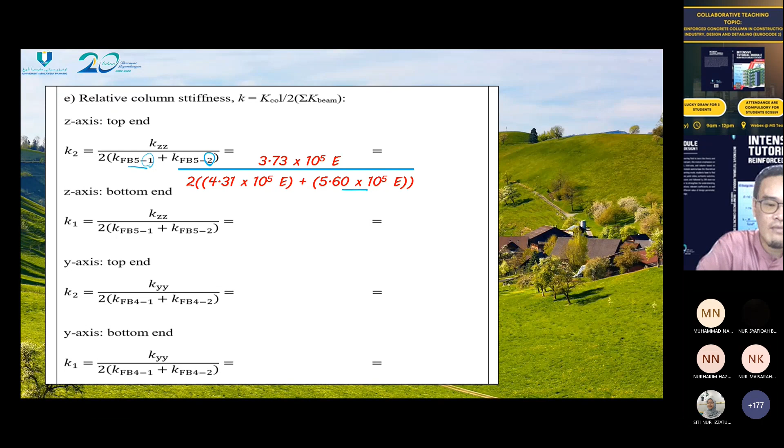So this one, the relative column stiffness. This one, the length also matters here. Let me give an example, one, two. This is the K, stiffness of FB5. This is span number 1, and then stiffness for span number 2. This is span number 2. So this is the answer.

So greater than 0.1, so we use K2 equal to 0.19. Here we use K1 equal to 0.19 also. This is the same, same equation, but you be careful of inserting the value. So this one we use K2 equal to 0.11. This is K2 equal to 0.11.

So once we get all these values, then we can calculate the effective length of the column. For the braced column, we insert back the values: this one K1, K2. The final answer is 1913 mm. And then for the y-axis, the final answer is 1810 mm.

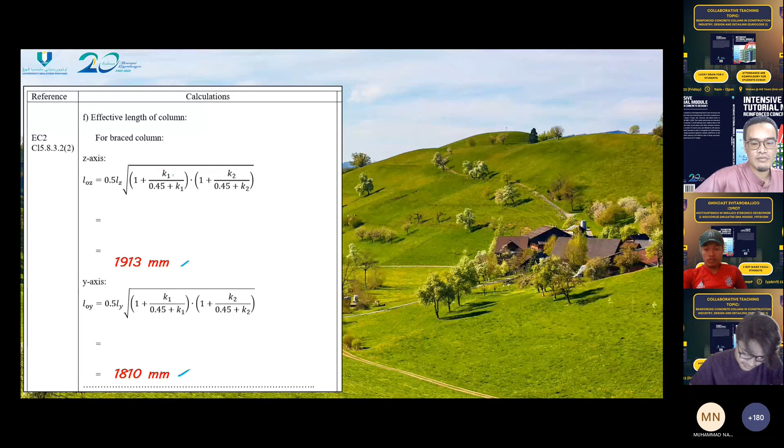Be careful, if the beam at the top and the beam at the bottom have the same size, it's okay, easy. If not, you have to recalculate the stiffness, because you have this K at the top and bottom. If the bottom is GB, and GB's size is not the same as FB, you have to use the GB value. If they're the same, it's fine.

Okay, so this is the radius of gyration. Just insert these values, then you get this value. 108.3 and then 72.3.

For the y-axis, the slenderness ratio you can calculate based on this equation. So the answer is 17.7 and 25, for Z and Y-axis respectively.

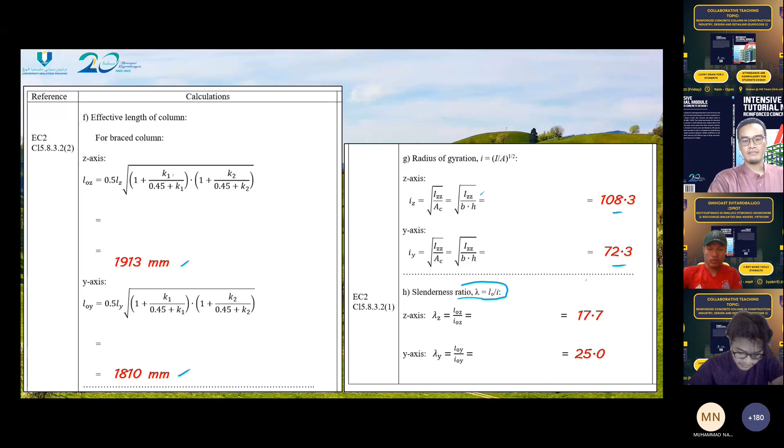Then we calculate the slenderness limit, based on this clause in Eurocode 2. So the value, the limit is equal to 20 ABC divided by square root of N. ABC is easy. If unknown, we can use 0.7 for A, 1.1 for B. And then C we need to calculate a bit.

Equal to 1.7 minus RM. RM is equal to moment at the bottom divided by moment at the top. So for the Z-axis, the answer is negative 0.41.

So RM equal to this one. Use this equation, CZ equal to 1.7 minus negative 0.41, so we get the answer. And then for CY, we will get 2.12. I hope you can try by yourself.

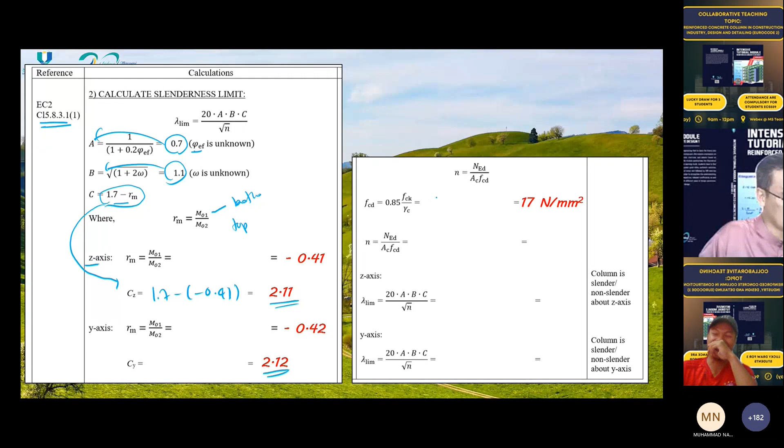And then slenderness limit, sorry, what comes next? Okay, slenderness limit. So this one is FCD equal to 0.85 times 0.85 times FCK which is 30.

Gamma C is 1.5, the partial safety factor for concrete. So the answer is 17. The value of N, because we need N here, N is equal to 0.97.

So the limit for the z-axis is equal to 33. You just enter the value of A, B, and C. For C, you use CZ, and for Y you use CY. This one is 33, the limit, and then the actual is 17.7.

So the column is non-slender, because it's still below the limit. The similar goes to the y-axis: 33.1 is the limit, larger than the actual, so it's also non-slender. This one is a non-slender column.

Non-slender column. So this one is the long method. This is an alternative solution, a shorter method, but we have to refer to the table. By using this solution, we don't need to calculate the stiffness, we can skip steps C, D, and E.

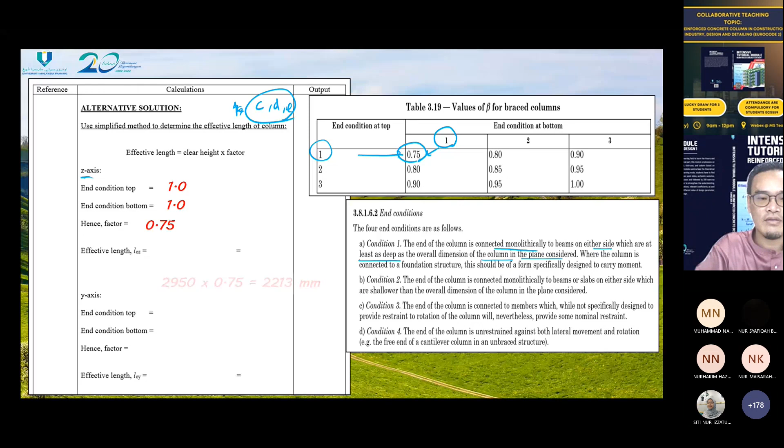So the effective length is equal to, as we calculated before, the clear height times the factor. Effective length is equal to this value. For the y-axis, the situation is similar, the condition is similar, so we get the effective length equal to 2269 mm. Then the slenderness ratio, just calculate.

L is 2213 divided by 108.3. So this is the ratio, and this is the ratio compared to the limit. The limit is 33.0, and the actual ratio is smaller, so this is also a non-slender column.

And then this is 31.2 compared to the limit, which is 33.1. Of course, if we use this alternative solution, the actual value will be higher compared to the method which involves the stiffness and moment of inertia and so on. So the column is non-slender.

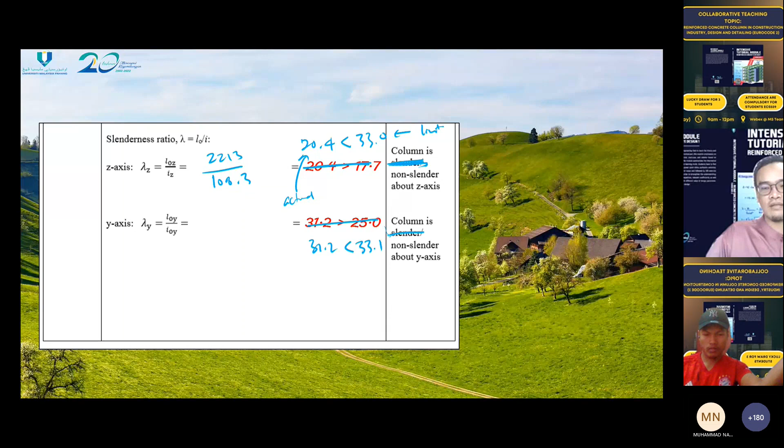So that's all for this tutorial. I hope you can try it by yourself later. Okay, Dr. Rozaina, that's all. Thank you.